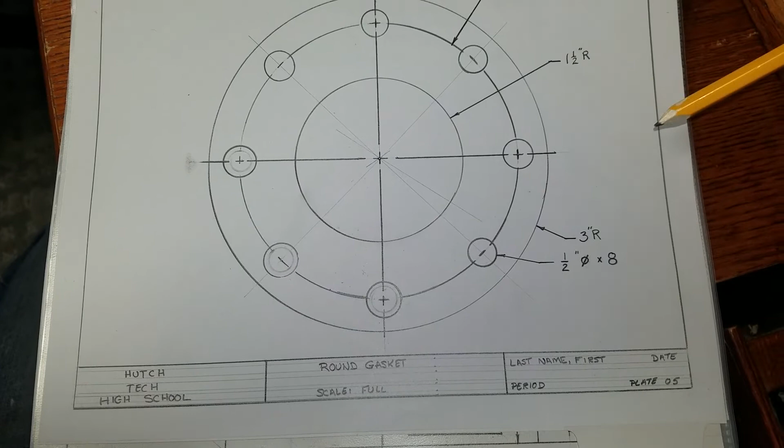Ladies and gentlemen, we are going to go through and quickly talk about Plate 5. Plate 5 basically is just a review of all the different tools that you've used throughout class. Keep in mind, title block, 1/2 inch border going all the way around. Okay. Notice they are dark. Notice the corners, how they are sharp.

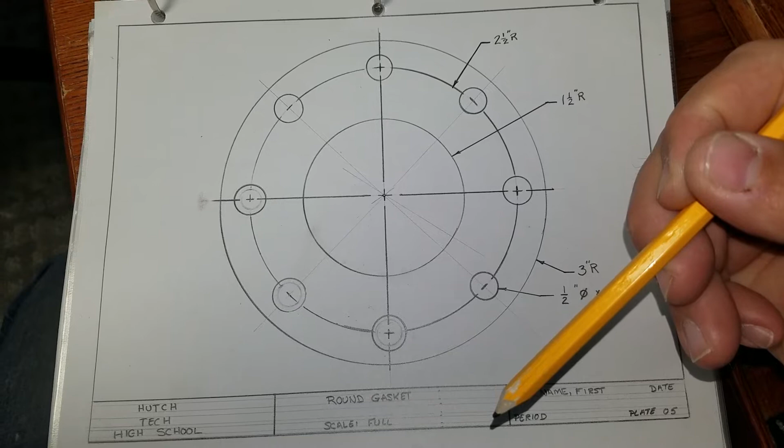Next thing you are going to do is you are going to measure up your 5/8 of an inch. You're going to darken that line in. You're going to measure your 3 inches over and your 3 inches over, and you're going to darken these 5/8 inch tall lines. Notice my guidelines. These are nice and light. Okay, it goes 16th, 8th, 16th, 8th, 16th, 8th, 16th. So you have 3 lines of text.

Notice my text is written to my best technical script. I tried to center it as best as I could. I could have probably moved round gasket over a little bit and full over a little bit. When you're writing out your date, one of the most common mistakes that people do is they write date and then they write the number after it. We don't need that. That's redundant. And then you're going to write period, whatever number you are. This is plate 5.

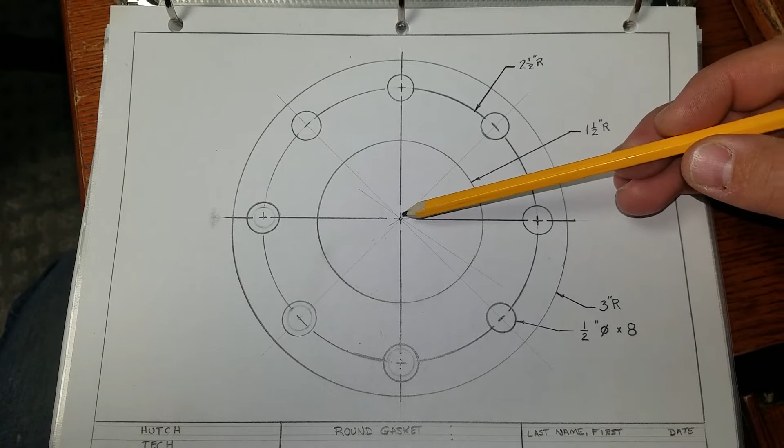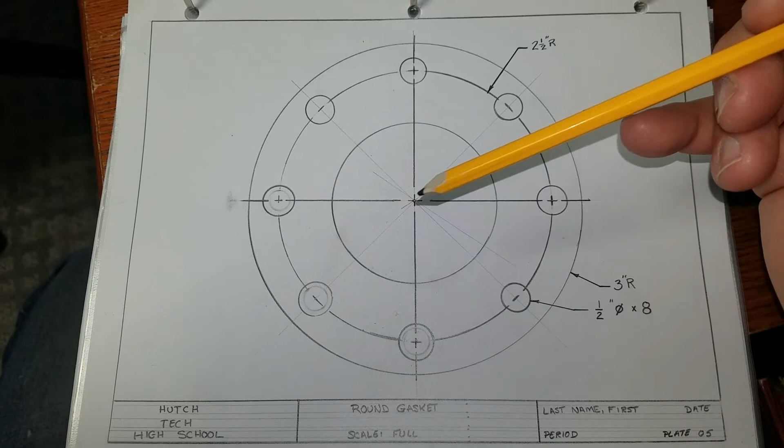For the actual drawing itself, you are going to find the center point of your drawing area. From this border to this border, and from this border to this border is your drawing area. We're going to go from this corner right here to this lower corner, drawing a very light reference line. You're going to repeat right here from this corner to this corner. That establishes your center point.

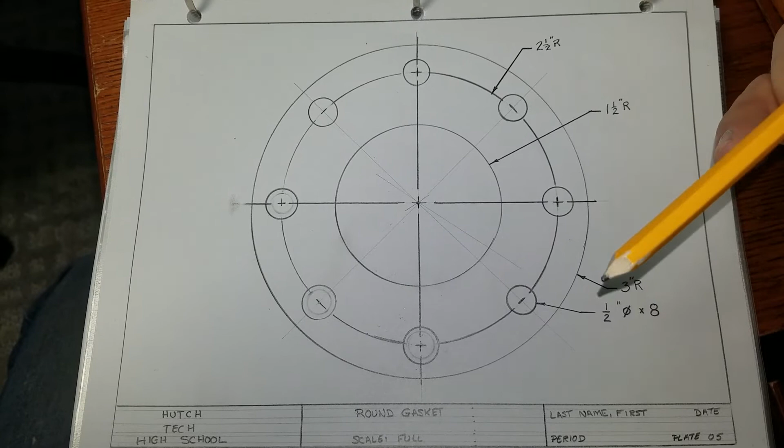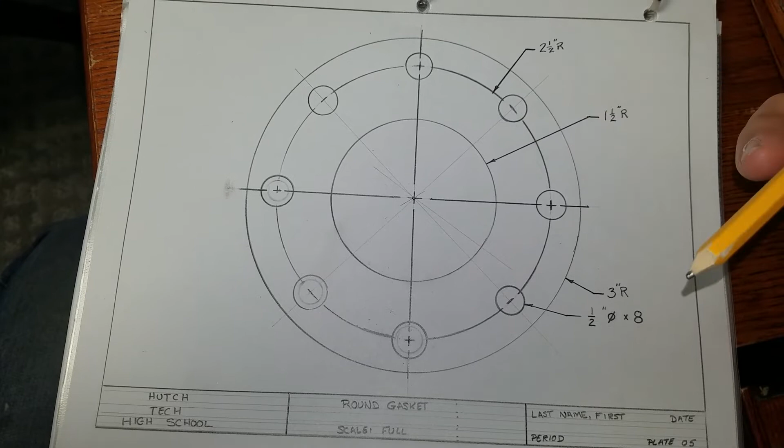You are going to be drawing 1 circle, 2 circles, 3 circles. The first circle is going to be a 3-inch radius, nice and dark. The next one is going to be a 2.5 radius. I want you to draw this light to start with because it's an interrupted circle. It's long line, space, short line, space, long line. If you think back to our lines drawing, this is actually what we call a center line. It just happens to be curved around a circle.

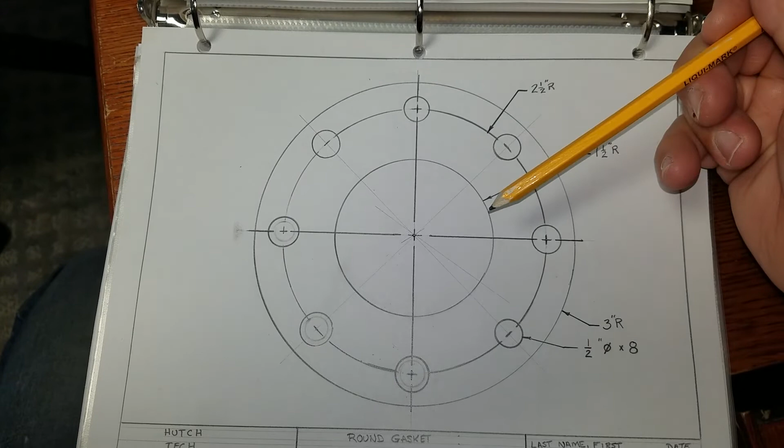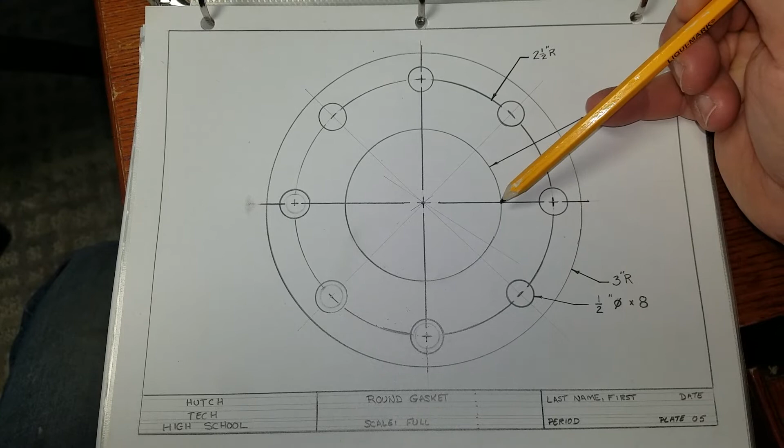The next circle is this one right here, which is 1.5 inches radius. Notice it's nice and dark. Radius means from center point to here is whatever this number is. If it was diameter, that would mean from here to here, and we would need to divide that by 2. Take a look right here. This is diameter, 1/2 inch diameter. So from here to here it's 1/2 of an inch. That means when you draw your circle, you're going to draw it 1/4 inch.

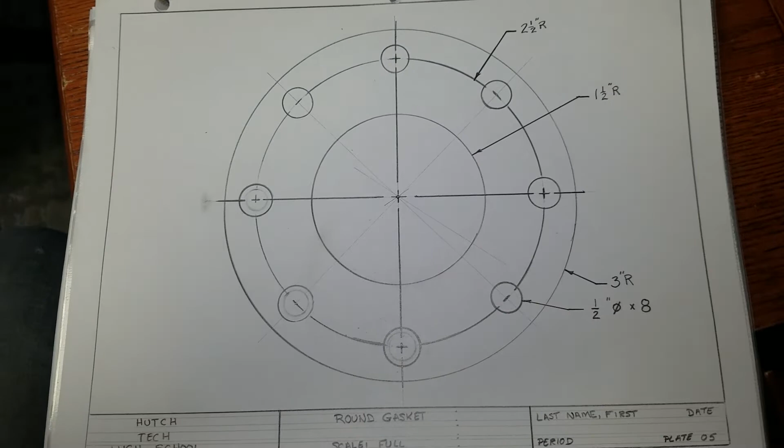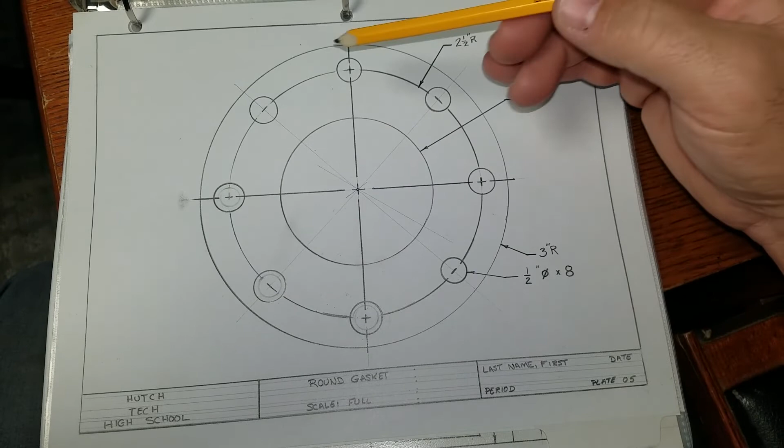So now let's talk about those circles. You'll notice that there's a quantity of 8. They are equally spaced. So if I take 360 degrees and divide it by 8, I come up with 45 degrees. So from this center point, you're going to draw a light guideline crisscrossing so that you can get your center points of where your circles are going to go. You're then going to draw these 8 circles in nice and dark. Set your compass to 1/2 of this diameter.

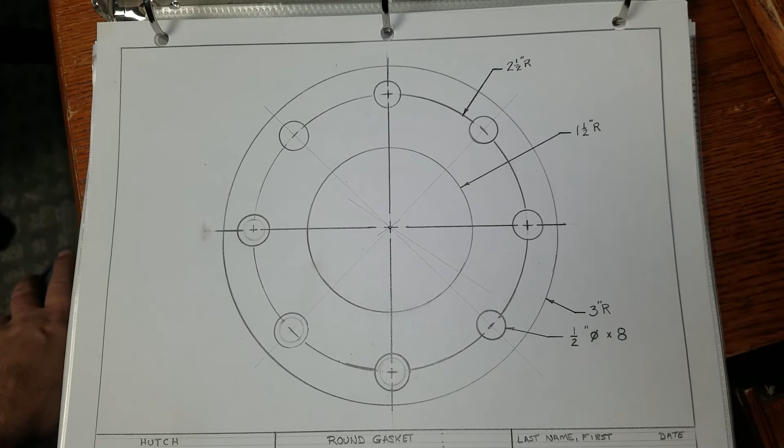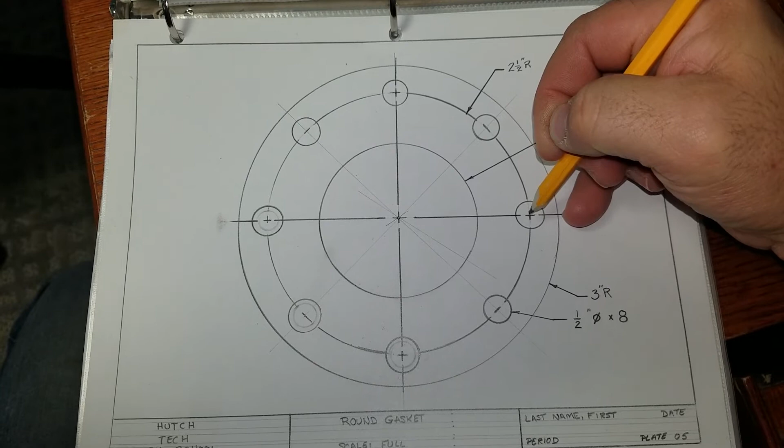Once you are done with that, you can go through and mark your centers by setting your compass back to this 2.5. You can darken this little tick mark. That tick mark is going to be about 1/8 inch down, 1/8 inch up. Leave a space and then you can darken in this part of the circle. It's going to take some practice to get used to. But your project should look like this, or even better, when you're all done.

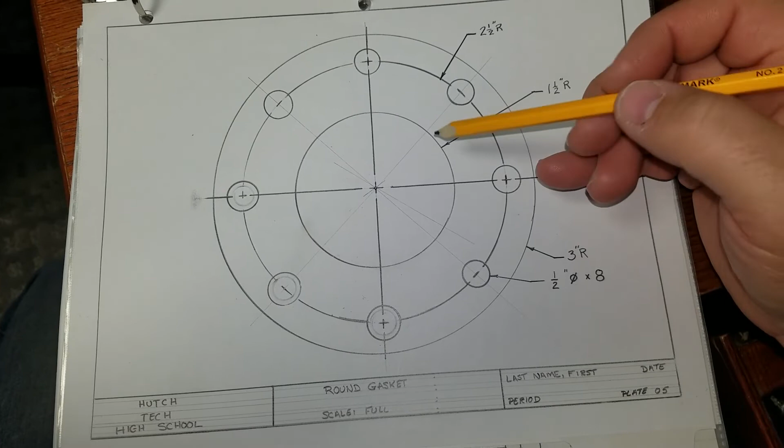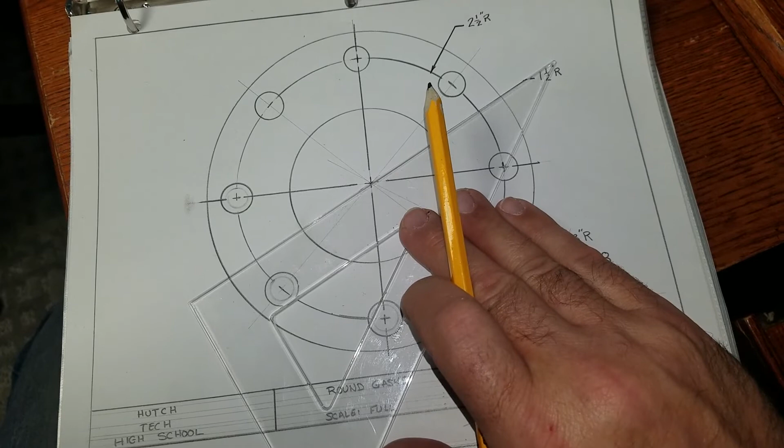The new thing that you're going to be doing on this project is dimensioning. Let me bring out my triangle here. When I draw these leader lines here, you're going to notice it points right to the center of its main circle. Rotate it here. Again, it's pointing to the main center. You can't just draw these willy-nilly. They always have to point to the center of whatever circle you're doing.

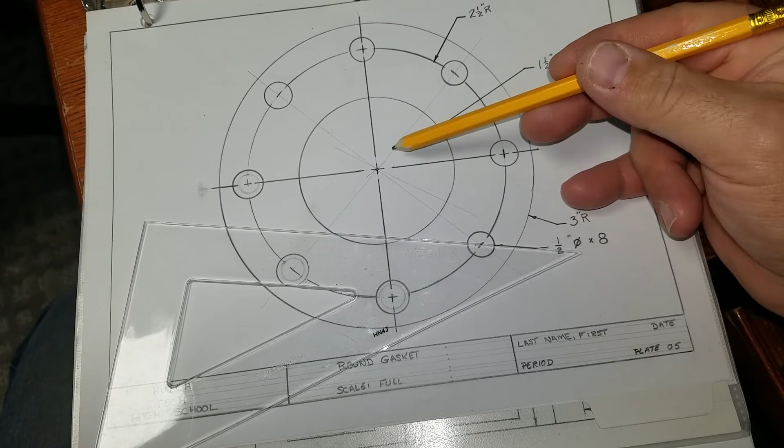So here, this is going to point to the center of the small circle because it's referring to the small circle, not the big circle. Okay.

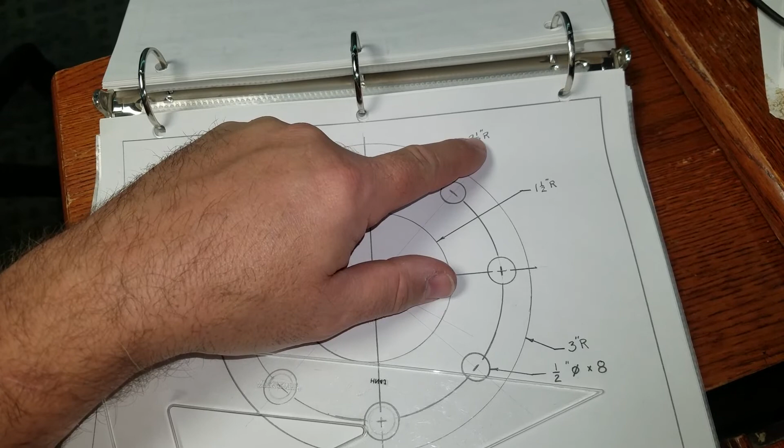When you write your text, you're going to create a light guideline for yourself. The first number, you can write that as 1/8 inch tall or 1/4 inch tall. Either one is acceptable in drafting. And then you write your fraction as 1/8 over 1/8. Your R could be that 1/4 inch again, or it could be 1/8 inch. Does not matter. But I want you to draw guidelines so that you get this nice and straight.

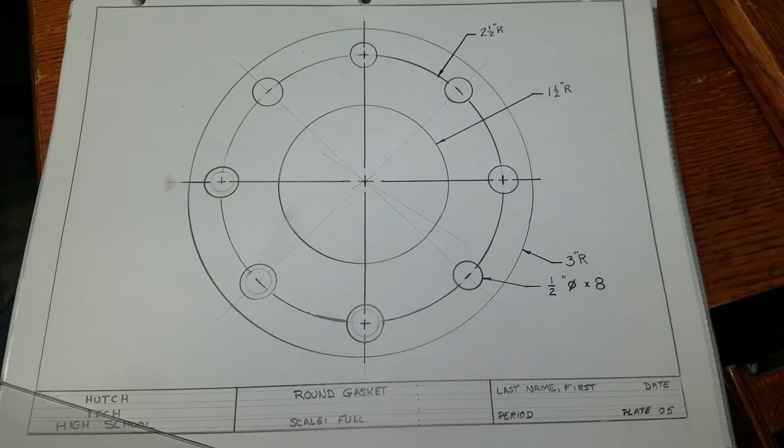Please show your rough draft to your instructor. Then they will approve it for final copy. Any questions? Don't forget to break out and talk to your instructor or your shoulder mates. Good luck.